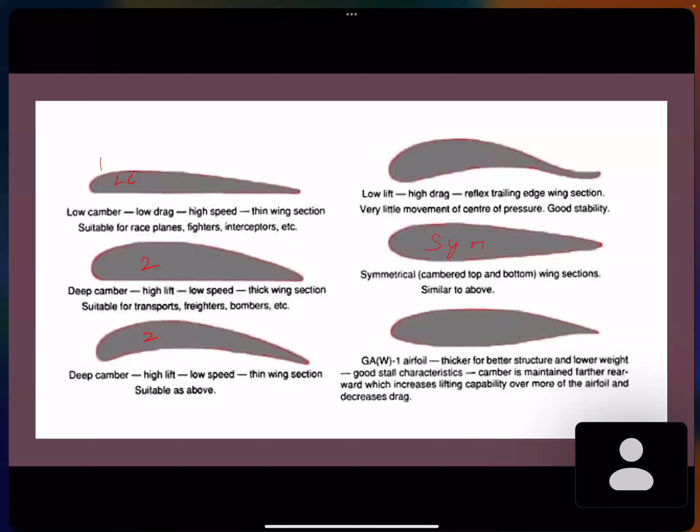Okay, I think it's visible now, right? So the first one was a low cambered airfoil. This is the low cambered airfoil. The other two are deep camber. Both of them produce lift at negative and zero angles of attack.

Then you have this, your reflex airfoil, right? So this is your reflex airfoil. Here it says the reflex trailing edge wing section. That is what Sarthak, I think Sarthak had said. I'm not sure who said it, but Sarthak had said that the trailing edge is curved upwards.

Then you have this last one. Can anyone tell me what this is? This airfoil, this last one. What type of airfoil is that? So you have low camber, deep camber, symmetric, reflex. What is this last airfoil?

Ma'am, I can't hear your voice. Okay, I'm sorry, can you hear me now? Can someone confirm? Okay, so you're able to hear me, right? Santosh, am I audible? Okay, can someone else confirm? Am I audible? Yes, ma'am, you are audible. Okay, thank you, thank you very much.

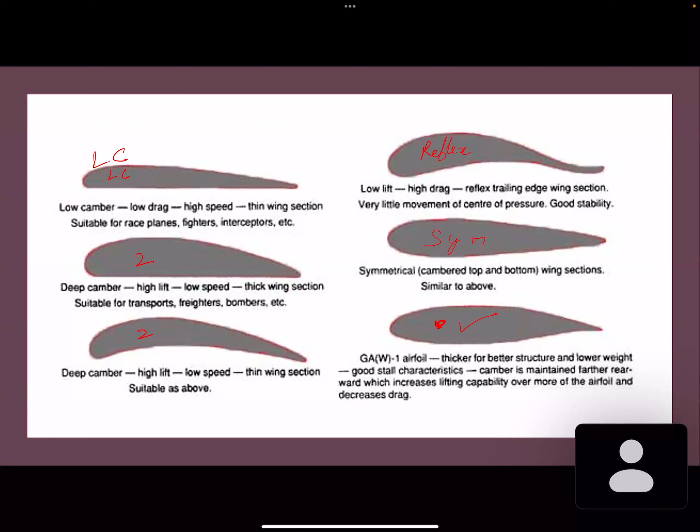Okay, so this airfoil is called a supercritical airfoil. Supercritical. Have you heard of it? The ones from the aerospace background, have you heard of it? Supercritical airfoil?

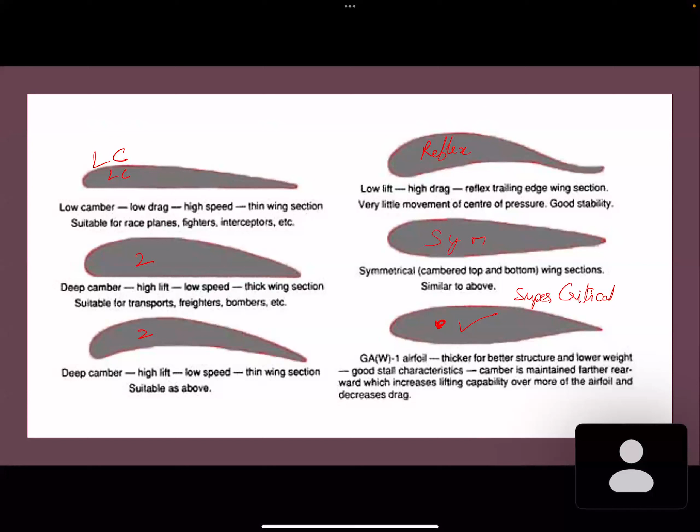Next question was, the aspect ratio of an airfoil is. Airfoil, like we just discussed, is the cross section of a wing, right? What is aspect ratio? What is the formula for aspect ratio? AR is wingspan by chord, is that true? Yes, answer is infinite. What was the formula for aspect ratio?

Okay, write down B square by S, right? So what was B? B by C will be true only if it's a rectangular cross section, right? Rectangular span, I mean. Otherwise it will be B square by S. So B is wingspan, S is the area, wet surface area, right? So B square by S is the aspect ratio.

Now what is the span of an airfoil? What is the B span of an airfoil? What is it? They've asked you the aspect ratio of an airfoil, so what is the span of an airfoil? Of an airfoil, it will be infinite, right? A wing is a finite body, so an airfoil, though we consider it to be the cross section, we assume it to be of infinite length. That is why your aspect ratio will be infinite.

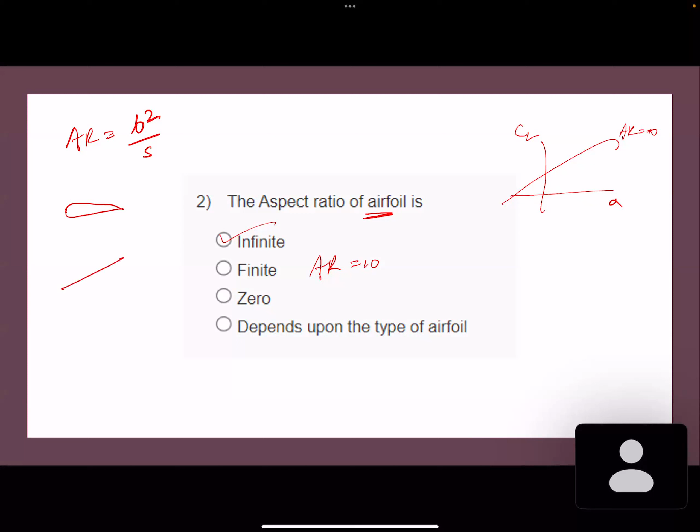Let's look at this. You have a wing of finite length. Initially it was just an airfoil of infinite length. Now when you make it a finite length, you have a wing whose cross section is the airfoil, with a finite length. This is the fuselage, where it's attached, and this is your wing tip.

So when there is an oncoming wind, this is your V infinity, the free stream velocity. When there is an oncoming wind, there is a flow below the wing surface and a flow above the wing surface, and both of them interact at the wing tip. When they interact there, you have vortex generation, with one velocity going from below and one velocity coming from above, and at that point vortices are generated because of this intersection of the flow.

Now when these vortices are generated, the effective angle of attack and effective lift reduce, so there's increased drag production and a reduction in lift. So what happens when you decrease the aspect ratio is that the lift reduces. This will be aspect ratio 10, and when I reduce it further, the slope reduces further, say to aspect ratio 5.

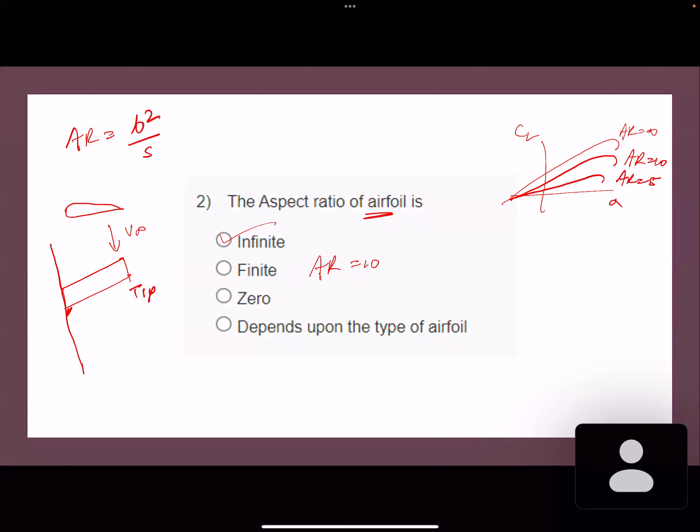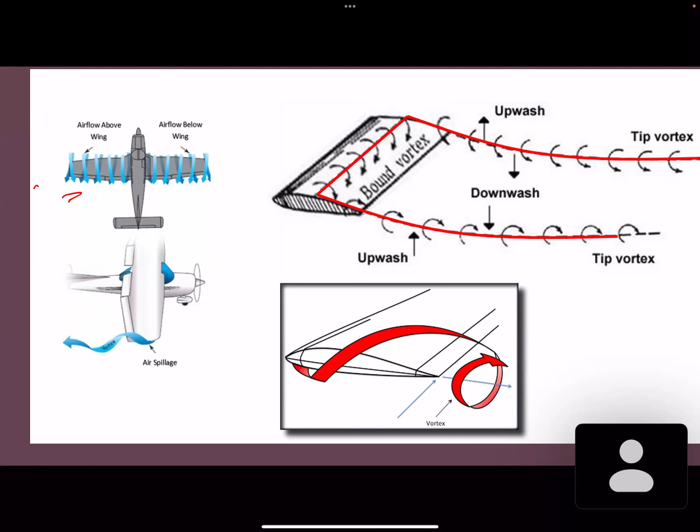Due to this vortex generation, the lift generation at the tip is reduced, which is why our lift curve slope reduced, because for the same angle of attack, your lift generation is less - there is an induced drag component. So vortex generation leads to reduction in lift and an increase in the drag component called induced drag. People from the aerospace background should know this - there is an induced drag component due to this vortex generation. These figures are just representative of the vortices.

Let's go to the next slide. Next question was: longitudinal stability of an airplane depends upon what? Now that you have gone through the week 1 contents, you should be able to answer this. What is stability? Can you tell me, not with respect to aircraft, just in general sense, what is stability?

Ma'am, it's like coming back to the original position after being disturbed. Yes, correct. So initially if it was at equilibrium, it means the tendency to come back to the initial equilibrium. You're right.

So when I say with respect to an aircraft, what will it be? For longitudinal stability, what will it be? Just extrapolate this idea of stability to an aircraft - initial tendency to... So if your aircraft is flying at some angle of attack and there is a gust and it's deflected upwards, so there is a pitch up, nose up. So the tendency of the aircraft to come back to its equilibrium is the longitudinal stability. This is with respect to longitudinal dynamics - when it is pitched up, the tendency of the aircraft to come back down is longitudinal stability.

Now which of these components do you think will contribute towards stability? Is it the tail arm, control surface area, type of winglets, or none of these? Do none of them contribute? Tail arm, yes, you're right. So we had in week 1 an equation of the tail contribution, which we'll be revising in a bit. So the tail arm is what contributes towards longitudinal stability.

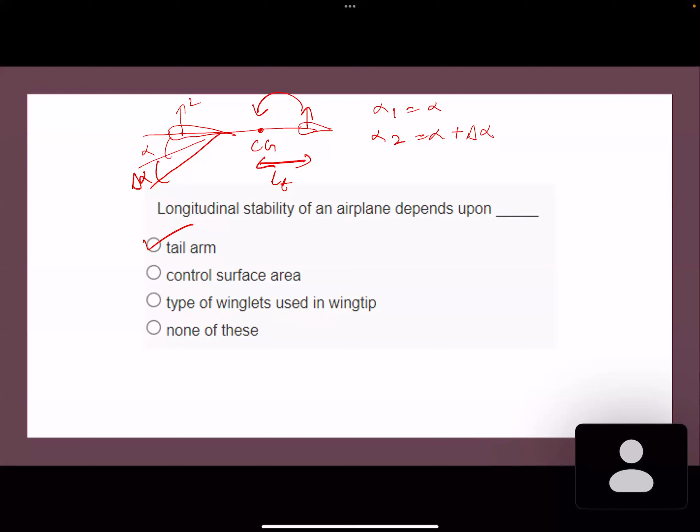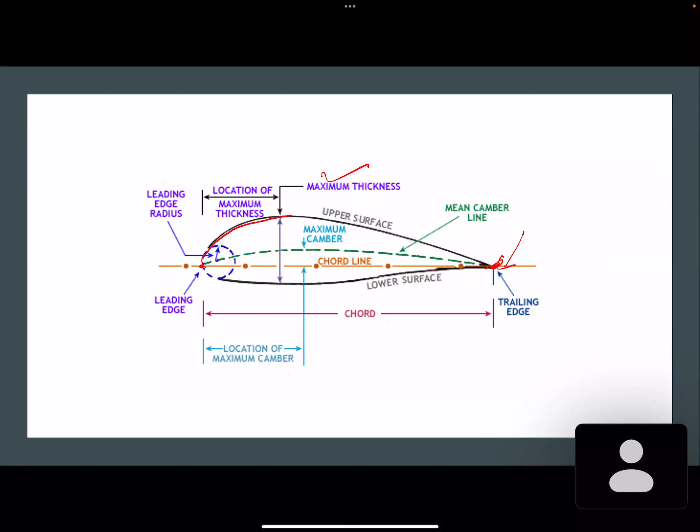So the mean camber line is the one in green, chord line is the one in orange. Both of them connect leading edge to trailing edge. What is the difference? Mean camber line is dividing both the parts equally. Yes, correct, so it is equidistant from both the upper surface and the lower surface. She's right. The chord line is just a straight line from the leading edge to the trailing edge, represented by C, chord length is C, maximum thickness is T. Those are the terminologies you need to be familiar with.

So now let's go back to the question: which of these terms is not associated with airfoil? T by C is the thickness to chord ratio - we know that exists. So you have the maximum thickness T, you have chord C. Next, spiral - did you see any spiral there? No, this is fairly simple. So camber exists, chord exists, so the answer is spiral. Yes, Nandini, you're right, it's spiral.

Okay, next - what is stability and control of an aircraft? Just don't look at the options initially. Just tell me - stability is the tendency to return to equilibrium when subjected to disturbance. I think the first two and the third have the same definition of stability. That is correct, right? So it has the same. Now let's look into control.

Can someone tell me what is control? Don't look at the options, just tell me what you understand by control. Stability is the inherent tendency of the aircraft to return to equilibrium position. What is control? Just from the term, what do you understand by control?

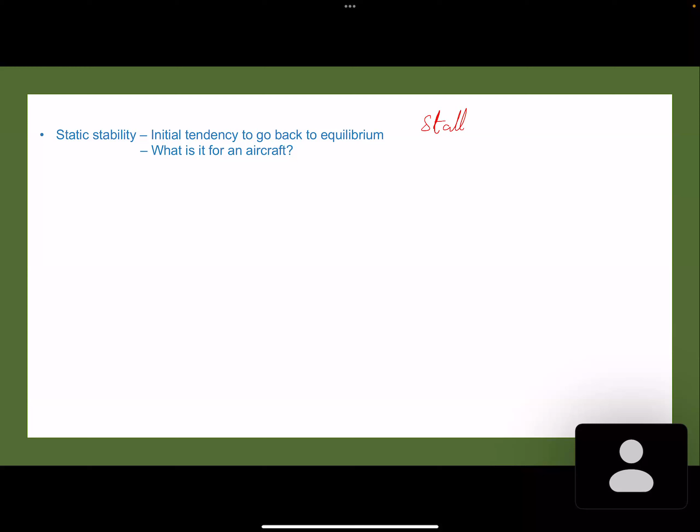Okay, so now both of them are right? There's also flow separation. Yes, all three are right in fact. So let me just draw this lift curve slope.

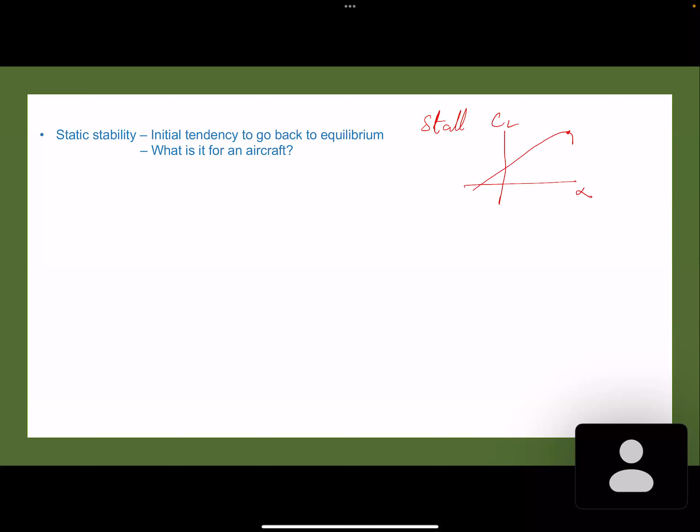So this is CL, this is alpha. Now this is your point of maximum CL, right? So when the angle of attack reaches this angle, which is referred to as alpha stall, it reaches the maximum lift generation capability. Any angle of attack beyond alpha stall, the lift drastically reduces.

So both the first points are right. Why does it reduce? Now let's look into that. So if this is your airfoil, initially this is your flow. Now I increase the angle of attack, something like this. What happens is it goes like this, right?

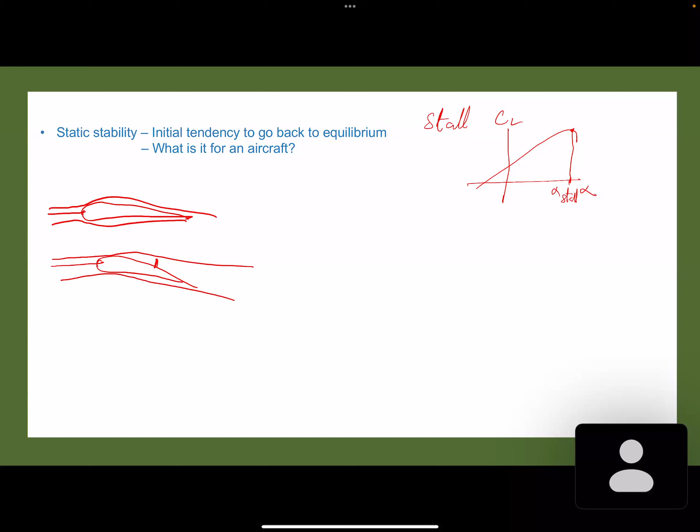So there is a flow separation here, and due to that flow separation, it is not producing as much lift as it should. So any angle beyond that alpha stall, it will not produce enough lift to sustain flight, and the aircraft will suddenly just drop. So all 3 points are right: max lift crossed, point at which lift suddenly falls, and this is why it's happening, it's because of flow separation. It doesn't produce enough lift to sustain the flight.

Okay, so this is the idea for static stability. Now I think sir would have taken an example of the ball in a bowl, so let's just go over that briefly. I think it's also part of your assignment, so let's go over it.

So there are 3 conditions: statically stable, neutrally stable, and statically unstable. Okay, so you have a bowl, and if I have a ball here in the vessel, and if I push it to this point, it has an initial tendency. In fact, it will swing and come back to its initial equilibrium point.

So this is statically stable. Now, if I keep the same ball on a flat surface, and if I move it, displace it to another location, will it come back to the original position? No, it will form a new equilibrium at the new point. This was the initial position, this is the new position. It will not come back to position 1, it will form a new stable equilibrium at the new position. So this is called neutrally stable.

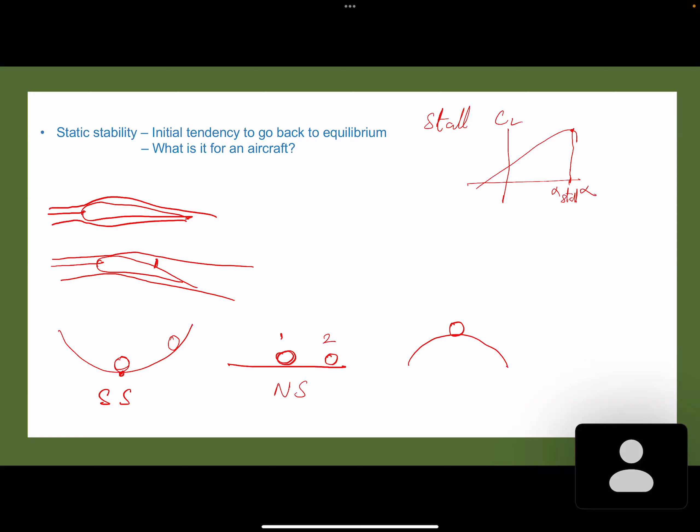Next condition is an inverted bowl, and I keep a ball over it. If I displace it even slightly, it will just keep going further away from the equilibrium point and show no tendency to come back. So this is unstable. Now this is static stability, which tells you that it has an initial tendency to come back to equilibrium.

What about dynamic stability? What does that bring into your mind? What does the word dynamic mean? Dynamic stability, just think about it.

Dynamic means moving. So when I say dynamic stability with respect to time, Nandini is right. Both of you are right when it's moving.

Let me take a graph and show you this. Suppose this is your equilibrium point, this horizontal line. I deflect it to some position, I disturb it, and over a period of time, if it decays and tries to come back to its equilibrium, it is dynamically stable. Now, same thing, if I had disturbed it and it continues to deviate away, it is unstable, right?

So this is the difference between static and dynamic. Dynamic is over a period of time, will it come back to its equilibrium or will it go away from the equilibrium? Static is just the initial tendency that it shows. So this is the difference.

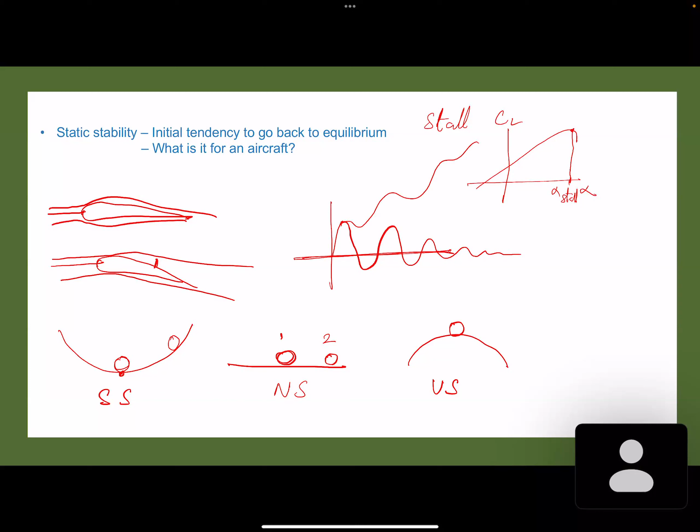So at the beginning of this course, we will be dealing with static stability and we'll slowly go on to dynamic stability. Now, the next concept that we dealt with was aerodynamic center, right?

So when you consider an airfoil, let me just draw this. When we study aerodynamics, what we see is that the lift and drag - what are the aerodynamic forces? Lift and drag, right? So lift and drag are presumed to act at a point called center of pressure.

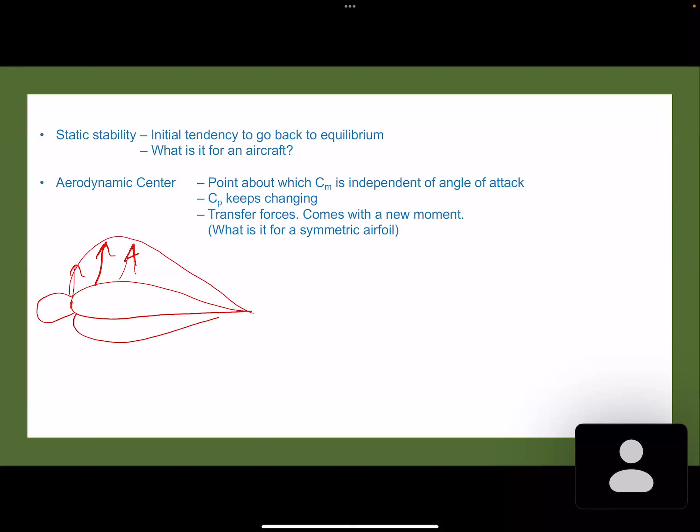So you have pressure being generated here, something like this. You have some profile like this, and this is negative pressure, and this is positive pressure, which is why your airfoil produces the lift, correct?

Now, it is presumed these forces, lift and drag, are presumed to act at a point called center of pressure. Now, what happens with the center of pressure is that it keeps changing with angle of attack. So when the same airfoil is kept at a different angle of attack, this pressure profile will change, right?

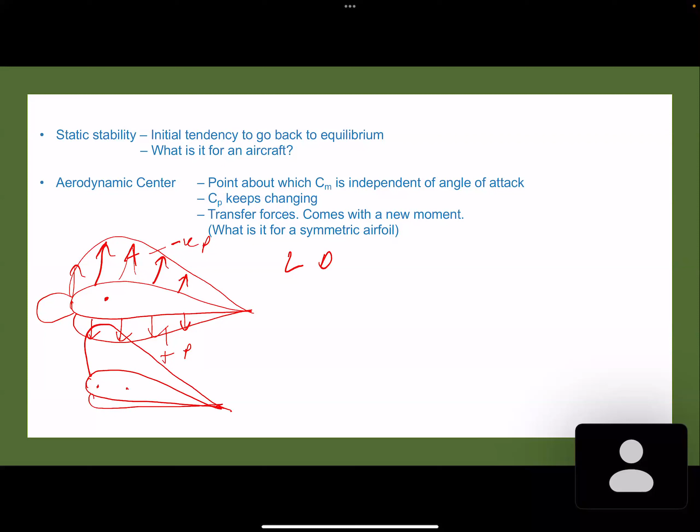So it will be something like this. The center of pressure moves ahead. It was initially here, it moved here. So with change in angle of attack, the center of pressure keeps changing. It becomes very difficult to analyze the moment and the forces when the point of reference keeps changing.

So we came about this point called aerodynamic center. What is aerodynamic center? It is a point that is independent of angle of attack. So aerodynamic center is the same point at which the moment remains the same throughout the flight duration. No matter how much the angle of attack changes, the moment at the aerodynamic center is the same. It becomes very convenient to do your analysis when the point of reference is fixed.

What happens now is, so this was center of pressure, and suppose your aerodynamic center is somewhere here. So our lift and drag are acting at center of pressure, but we wish to do our analysis at aerodynamic center because it is easier, right?

So when I transfer the forces to a different point, the forces get transferred. So my lift and drag are now here, but together with that, what comes? A moment is coming into picture, right? So when I move the forces from center of pressure to aerodynamic center, it comes with a moment.

So in this case, the drag will not produce any moment. Lift will produce one pitch down moment, nose down, right? So it is in this direction - nose down moment is produced. So that I can write it as M at AC. So when I move the forces from center of pressure to aerodynamic center, at the aerodynamic center, you have lift, you have drag, and you also have a moment, MAC, okay?

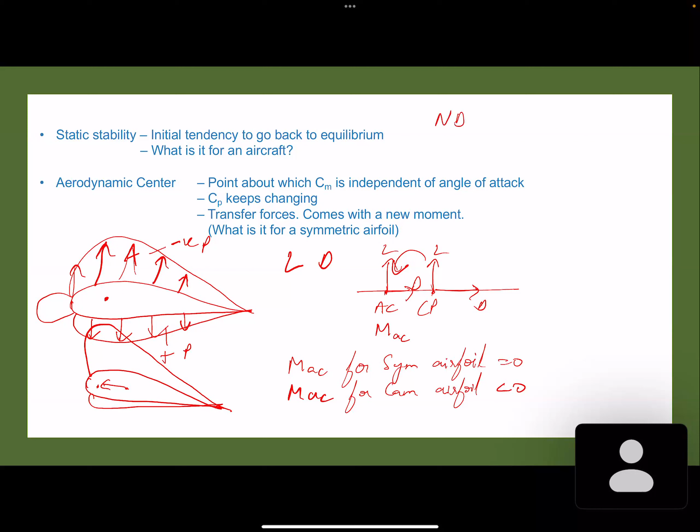So when I transfer the lift and the drag to AC, it gives you a nose down moment. By convention, nose down is negative, nose up is positive. This is the longitudinal motion convention: pitch up or nose up is positive, pitch down or nose down is negative.

So for a cambered airfoil, it produces a pitch down moment. So the moment that comes when I transfer the forces is pitch down, so it is negative. MAC for a cambered airfoil is negative.

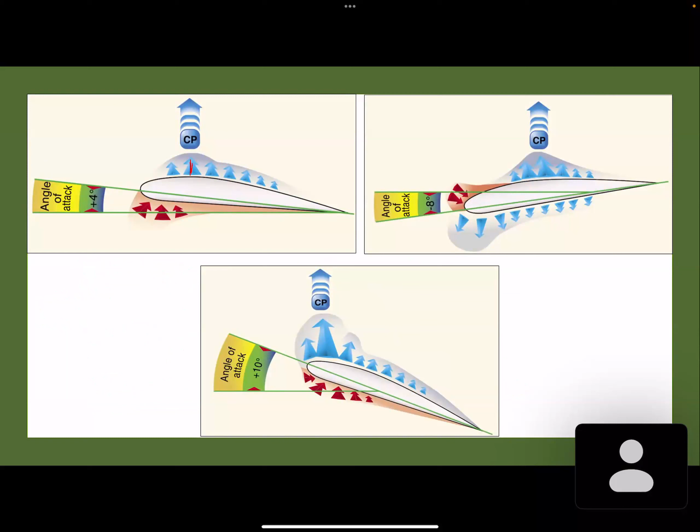This is just a depiction of how the center of pressure keeps changing with respect to change in angle of attack. Initially it's at this point. When I reduce the angle of attack to -8 degrees, the center of pressure moves back. When I increase the angle of attack to 10, it moves ahead. So the analysis becomes extremely inconvenient because your point of reference keeps changing, which is why we came up with the aerodynamic center.

Now another concept that was introduced is trim. Trim is something like an equilibrium, where the sum of the forces and moments are 0. So trim is the point where summation of all your forces and moments are 0. That is just the concept.

Now I've put the pitching moment convention here. Nose up is positive, we had just discussed this. Nose up is positive, nose down is negative. Pitch up is positive, pitch down is negative.

Now this is the equation for pitching moment coefficient: Cm equals Cm naught plus dCm by d alpha into alpha. So it is a straight line. We are assuming it to be a straight line variation with the intercept as Cm naught and slope as dCm upon d alpha. Now for static stability, we require the slope to be negative.

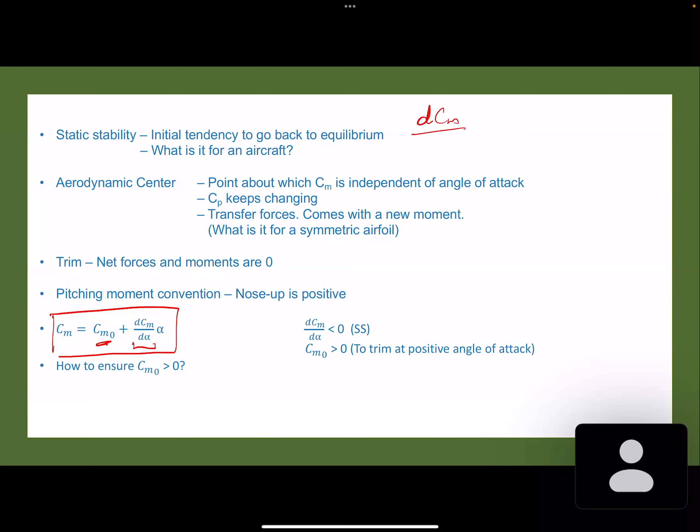The sole condition for static stability is that dCm by d alpha, which we refer to as Cm alpha, should be less than 0. This is the condition for static stability. Another condition that Sir has also mentioned in the lectures is that Cm naught should be greater than 0.

So now when I look at the curve, we know that Cm alpha should be negative, and we know that Cm naught should be positive. I'm just drawing for a typical aircraft. How will it look? This is your line: this is Cm, this is alpha, this is Cm naught, and you have a negative slope. So this is a statically stable typical aircraft.

Now, if I have Cm naught negative, how will the curve look first of all? Can someone tell me? Here Cm naught is positive. If I have to make Cm naught negative, how will the curve be shifted?

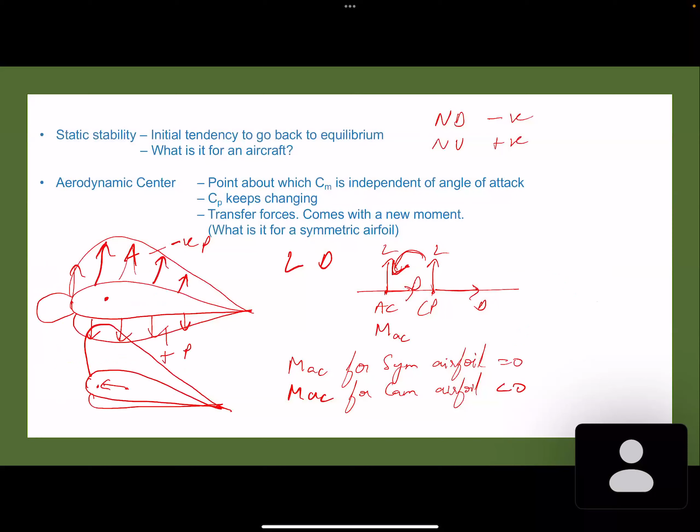Now I've put up this question that asks how to ensure Cm naught is greater than 0. Now let's get back to our initial question of reflex airfoil. Where was that? Yes, so this is our reflex airfoil. Now, can you try, with the knowledge that you have now, to tell me why do

we have reflex airfoil? So for symmetric airfoil, this is symmetric, this is cambered. Your Cm naught or CMAC is 0, right? Because center of pressure and aerodynamic center are the same point. For symmetric airfoil, the Cm, pitching moment that comes because of transfer of forces, is 0. For cambered airfoil, your CMAC is less than 0.

So for reflex airfoil, what will change? For cambered airfoil, this is your CP, this is your AC. For reflex airfoil, how will it look? Just try to put everything together.

Just try. So symmetric airfoil, CMAC or Cm naught in this case is 0. Cambered airfoil, it's less than 0. That means cambered cannot be trimmed at positive alpha. So if I have to trim the aircraft at positive alpha, what do I have to do?

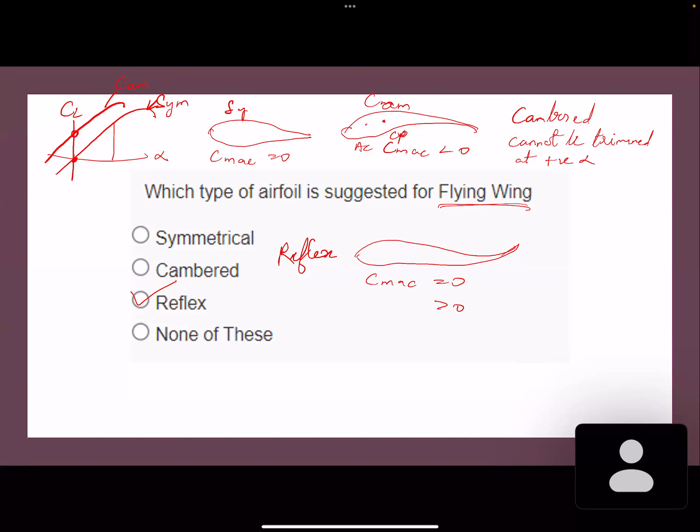So I had mentioned that we prefer CMAC to be greater than 0 so that we can trim the aircraft at a positive angle of attack. But even 0 is fine. But you do not generally prefer to trim your aircraft at negative angles of attack, which is why we don't take a cambered airfoil for just wing configuration.

So the trailing edge curvature up ensures that the CP moves towards aerodynamic center. So ideal case for reflex is AC and CP at the same place, or CP can even move ahead, producing the CMAC greater than 0. Depending on the curvature at the trailing edge, CP can either be at AC or ahead of AC, giving you CMAC 0 or greater than 0.

So this is for CP equal to AC. This is for, what do I say, CP ahead of AC. So that is why we brought into picture the reflex airfoil, that is why it was designed. Let's get back to our slides.

So can you think of any other way we can ensure Cm naught to be greater than 0? So if it is just a wing, there's nothing you can do except for the reflex airfoil. Any other way to make Cm naught greater than 0? You have all gone through week 1 contents, right? So I'm just going over the topics. So from whatever you've learned in week 1, can you try to tell me another way we can make Cm naught

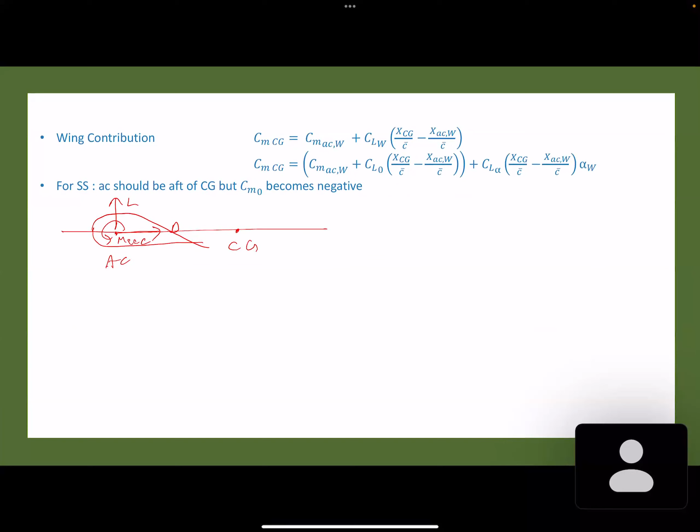So this equation, I'm pretty sure you know how to derive it, but I'll just write it down. So if you have just a wing, so your fuselage reference line, you have a wing, and this is your CG, this is your AC. So your lift is here, drag is here, and you have some moment at AC. So now let's take the forces at the CG, so moments at the CG. So you have Mcg equals, can you just give me the equation, equilibrium equation?

So it will be lift. Okay, before that I need to mention the, one second.

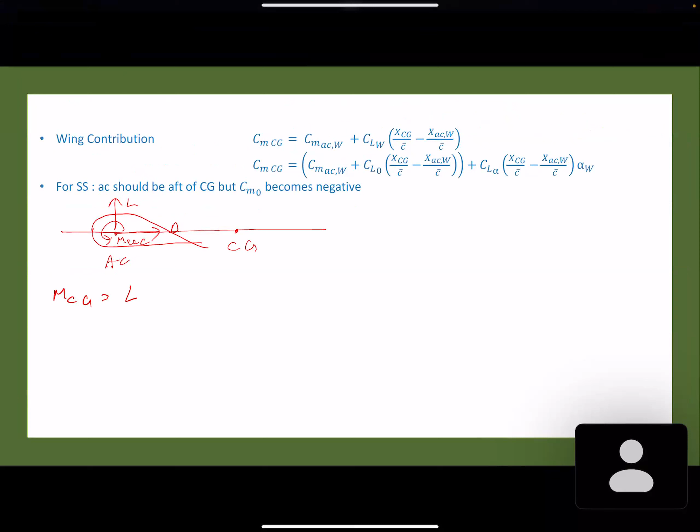So this was XAC and this distance is XCG. Okay, now let's take the moments at CG. Moment at CG is lift into XCG minus XAC. Now drag will not produce any moment because we've considered CG to be on the fuselage reference line. Then you have plus MAC.

Okay, so now you non-dimensionalize it by taking the coefficient of moment, so you have CMCG. So what was CL? What is the equation for CL? Okay, so lift is half rho v square S CL.

So similarly, what is pitching moment? Half rho v square... Am I audible? Are you with me? Yes ma'am. Okay, so lift is half rho v square S CL. Now for pitching moment, M is half rho v square... so you know there will be a CM here, but what else? Are you familiar with this equation? Yes ma'am. Okay, so similarly try to tell me for pitching moment, half rho v square, it will be S and C. Exactly, Harshal is right, so half rho v square S C CM.

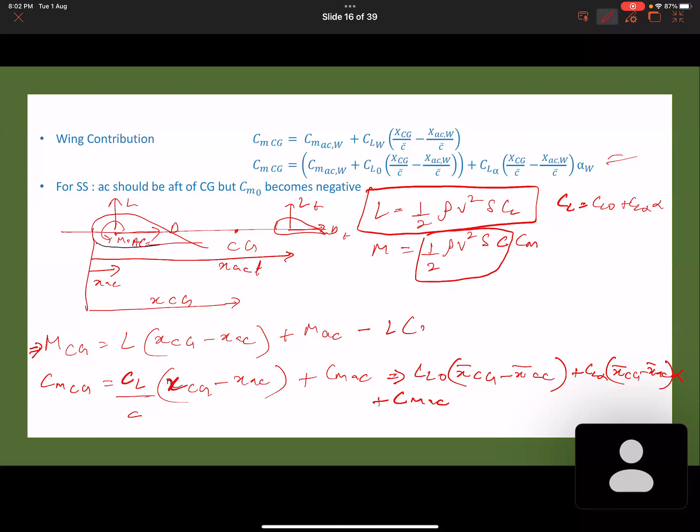Now if you have a tail, you take its lift and its drag, so you will have lift tail, drag tail, and another distance XAC tail. Similarly you add on the components, so here you will have minus L tail into XAC tail minus XCG, right? And then you derive it so on and so forth to get your wing contribution, tail contribution. So this is your wing contribution and this is your tail contribution.

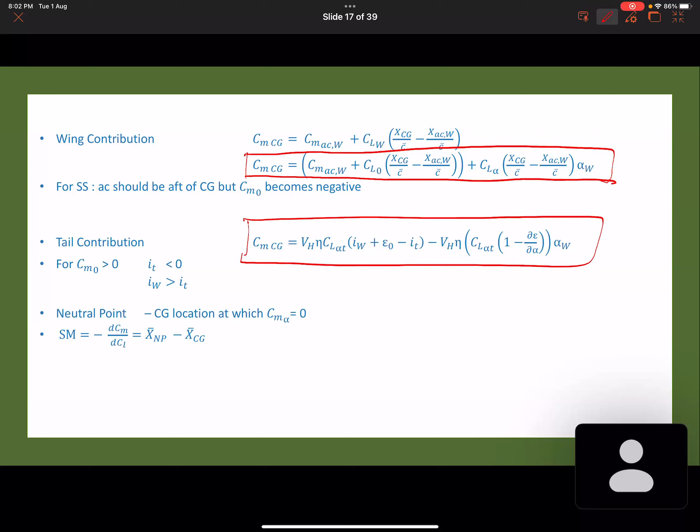Okay, let's go to the next slide. Yeah, so this is your wing contribution, and this is your tail contribution. Okay, so now each of those contribute towards CM naught, CM alpha. Our main equation was CM is CM naught plus CM alpha into alpha. So now in this wing contribution, what is CM naught?

This is wing, this is tail. In the wing contribution, what is CM naught? What is the wing contribution towards CM naught? Just equate these two equations. So the terms dependent on alpha, terms independent of alpha, just look at that.

Okay, in this wing equation, can you tell me what terms do not depend on alpha wing? This alpha wing, which term does not depend? Yes, first two terms, correct. So this entire thing is the CM naught contribution of wing, and this one is the CM alpha contribution of wing. Similarly for tail, this entire thing is the CM naught contribution of tail, and this entire thing is the CM alpha contribution of the tail.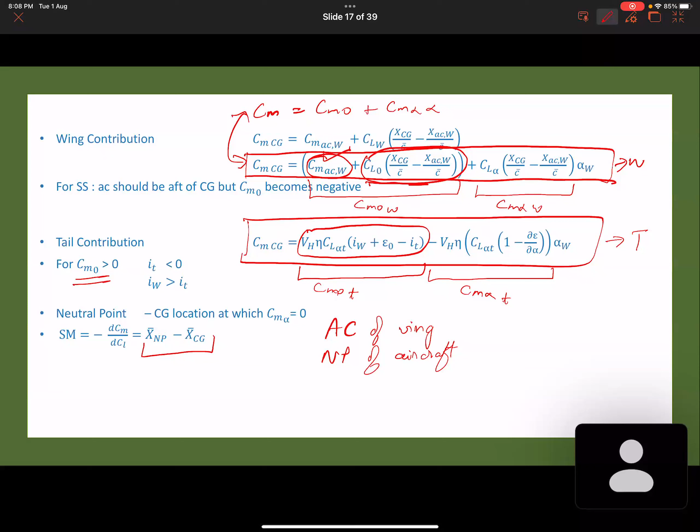Now let's look over a few questions based on these concepts. So aerodynamic forces acting on the aircraft depend on relative ground speed, wind speed, relative airspeed, or none of these. What are the aerodynamic forces? We just discussed this.

Drag, lift. Yes, lift and drag. So do they depend on relative ground speed, wind speed, relative airspeed? What is it? The formula we just wrote, lift is... what was the formula? In the previous slide we wrote it, where was it? Yes, this formula: CL half rho V square, half rho V square S CL. It depends on this velocity. What velocity is this? It is the relative airspeed, right? So it is your free stream velocity. Either the aircraft is moving with respect to the air or the oncoming air. However you see it, it's the relative airspeed. So this is the answer.

Somebody has said lift, drag, thrust, and weight. How can you tell me thrust is an aerodynamic force? Does it depend on the relative airspeed? So thrust is a propulsive force, right? Your propulsion system produces the thrust, either the propeller or the jet engine or whatever produces the thrust. So thrust is a propulsive force, and weight is definitely not an aerodynamic force. It is the gravitational component, right? Gravitational force. So you have three main types of forces: propulsive, aerodynamic, and gravitational. Gravitational is the weight, propulsive is the thrust, and aerodynamic is the lift and drag.

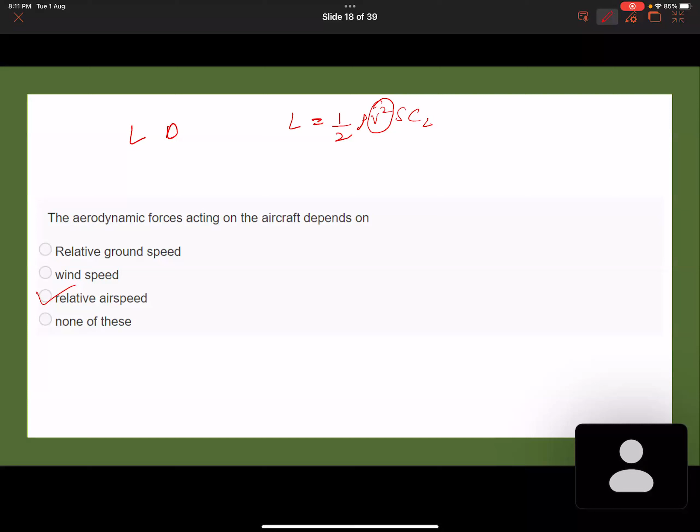Okay. I hope that settles that. Okay. Let me know if you have any question.

Okay, next question. So lift and other aerodynamic forces are generated by the motion of an aircraft through air. Okay. Which one is correct about aerodynamic center of an aircraft? Aerodynamic center does not depend on location of center of gravity. It depends on location of center of gravity, depends on neutral point, or none of these.

What is aerodynamic center? Can somebody just give me a definition? We just discussed this. Where ma'am, net pitching moment is 0. Yes. Okay. Where pitching moment is independent of angle of attack. Sorry yes ma'am, where pitching moment is 0, what is that point called? So aerodynamic center is where Cm is independent of alpha. What you had said is pitching moment is 0. What is that point called? Maybe neutral point. No, just think about it.

Center of pressure is where lift, drag, and all forces actually act. We transfer them to the aerodynamic center for ease of analysis. So let me clarify this once and for all: center of pressure is where lift and drag act, while the aerodynamic center is where CM is independent of alpha. So aerodynamic center is also where you transfer your lift and drag. Next point is where CM naught is 0, or where the moments are 0, where the forces are 0. What is that point?

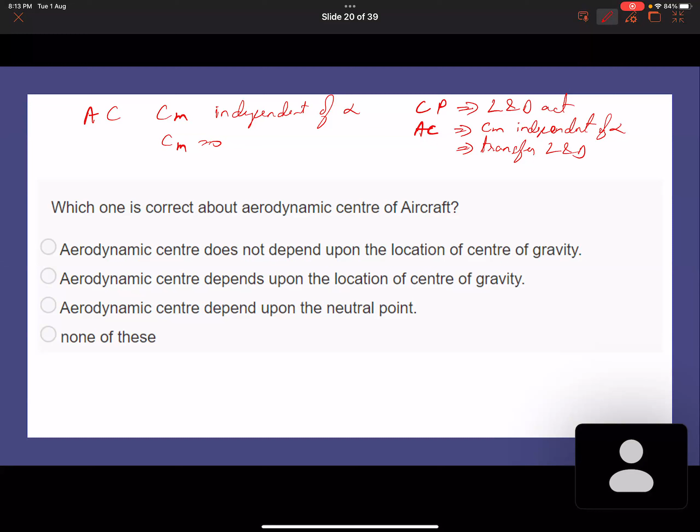We just discussed this, right? Where the net forces and moments are 0, that's called trim. So this would be trim.

Coming back to the question, which one is correct about aerodynamic center? Aerodynamic center is the point where CM is independent of angle of attack. That is the only way to define it. Now look at the options: it does not depend on location of center of gravity, it depends on location of center of gravity, or it depends on neutral point.

Does it depend on the location of center of gravity? Does the aerodynamic center depend on location of center of gravity? No, correct. So that is the right answer.

What is center of gravity? That's another point, CG. Another one is neutral point. Let's discuss all of these. What is CG? Very simple - net weight acts. What is neutral point?

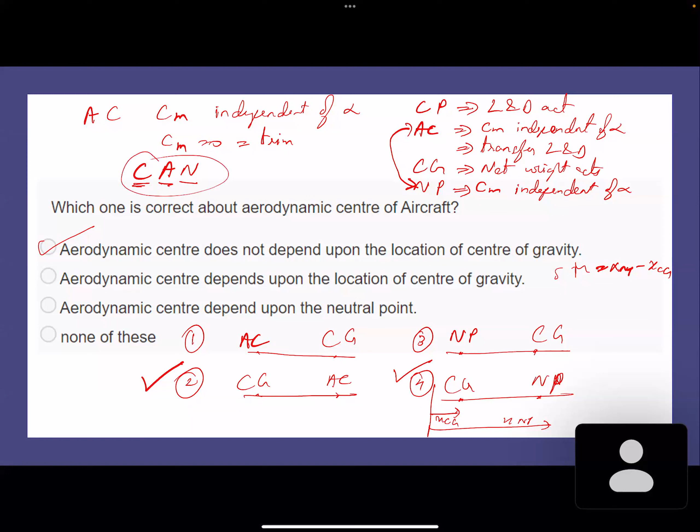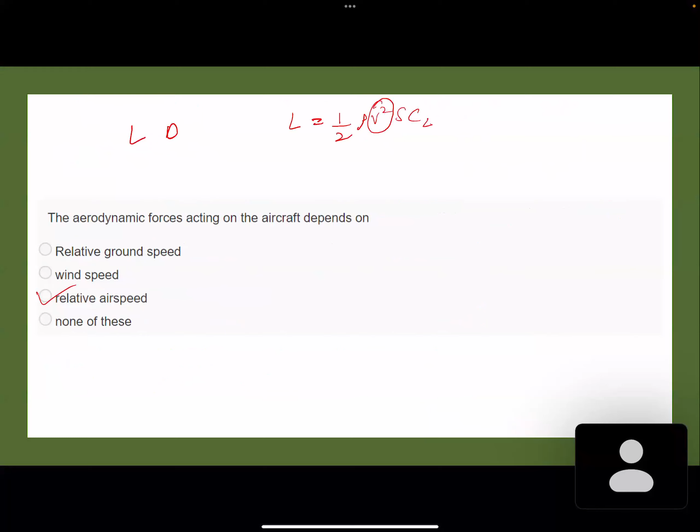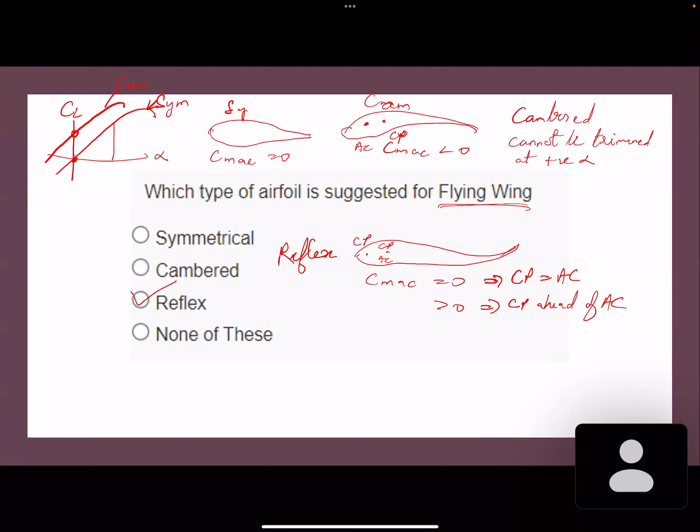We had just discussed this, where is it? Yes, in the very first slide we discussed this. So if this is a cambered airfoil, AC is here, is CP ahead or behind AC?

Behind. What happens? Let's go back to our slide. When I transfer the lift to AC, it comes with a moment - nose down or nose up moment? When I transfer this lift to AC, it comes with clockwise or anti-clockwise moment? Anti-clockwise, which in this case is nose down, right? So it comes like this, that is nose down. Nose down is positive or negative? Negative. So your answer is negative.

It's the same question as this one, just phrased in a different manner. Do not get confused. They're asking you for the same thing: a positively cambered airfoil produces negative pitching moment about aerodynamic center. That means your Cm naught, or CmAC, is negative for cambered airfoils, while Cm naught equals CmAC equals 0 for symmetric airfoils. So these are just two ways in which the same question is being asked. Do not get confused.

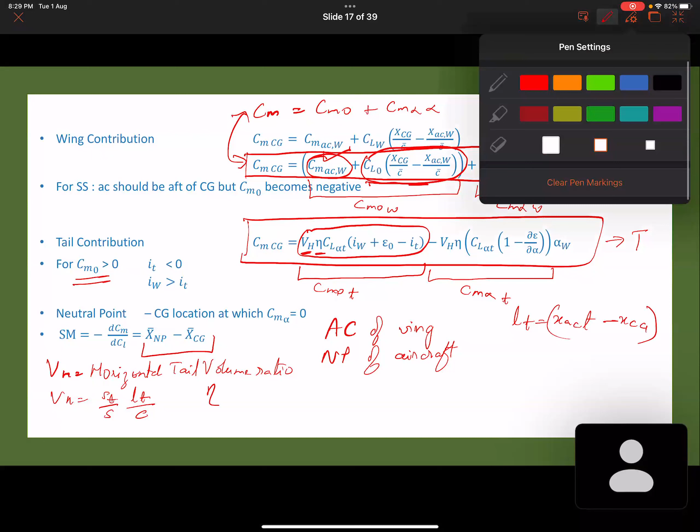Okay, next, what is this eta? What is eta? It is V infinity dash square by V infinity square. What is V infinity? It's the free stream velocity seen at the wing. Now at the tail, due to this vortex generation, there is a reduction in the velocity, so it will not be the same velocity, which is what this ratio represents - it's the tail efficiency factor. CL alpha tail, what is that?

What is CL alpha tail? How do you categorize that? It's the lift curve slope of the tail, right? Correct me if I'm wrong.

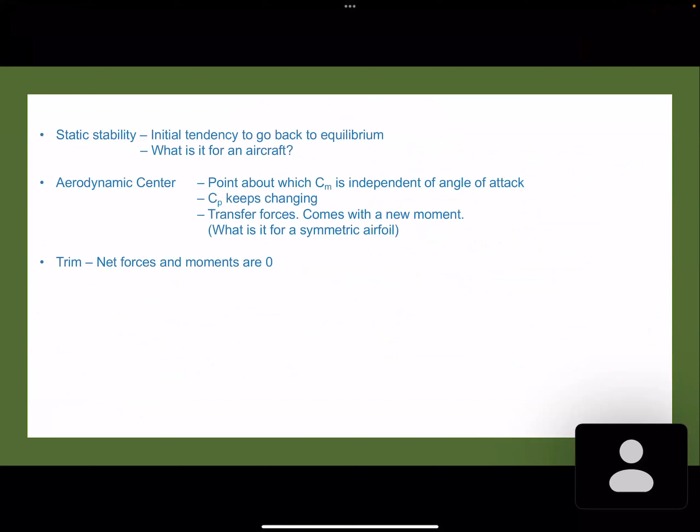Just try to get an empty slide. So this is your lift curve slope, right? If I write the equation for this in the linear section, you have CL equals CL naught plus CL alpha into alpha. So this is your intercept, this is CL naught. This slope is CL alpha. CL alpha is dCl upon d alpha, the lift curve slope.

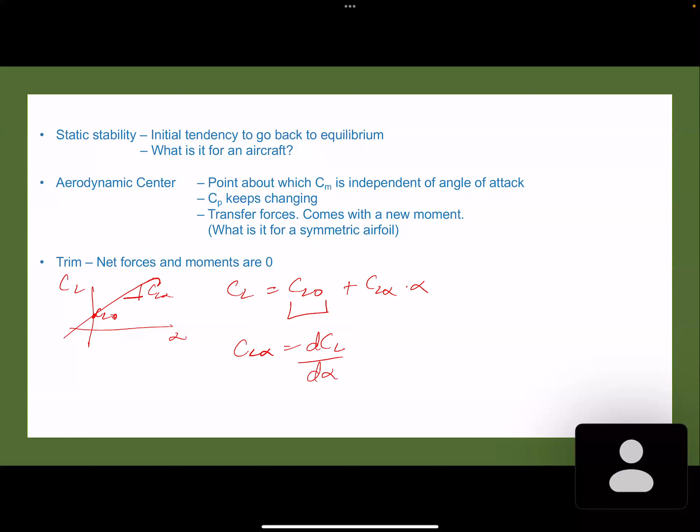So that is the lift curve slope of the tail. Now what is IW? One of you had in fact told me when I asked what is Cm naught greater than 0, you had told me this thing. What is IW?

Am I audible? Yes ma'am. Okay, can anyone try to tell me what is IW? No? IW is the wing setting angle. What is wing setting angle? From the word, can you try to tell me what wing setting angle is?

Let me draw this. This is your fuselage reference line. Now if your wing is initially fixed on the aircraft at an angle, this is your I wing. Aircraft is not flying anything, it's at the ground level. If your wing is fixed on the fuselage reference line at an angle, that is called wing setting angle. Similarly, IT is tail setting angle. Is that clear?

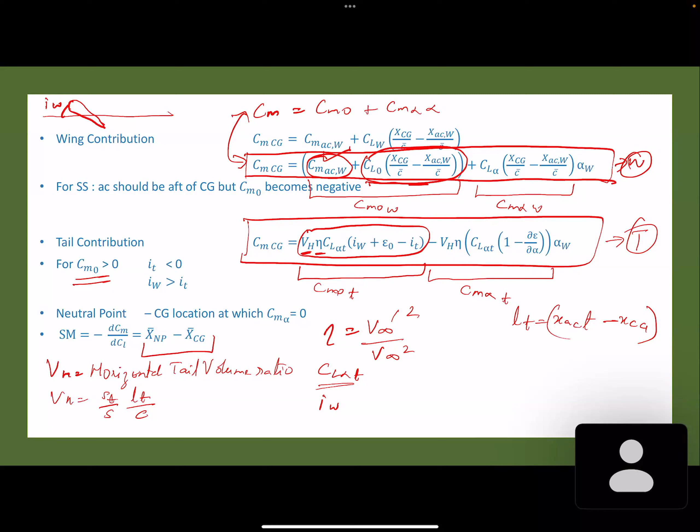So I'll just go over this epsilon. Let me just erase these. So anywhere you have any doubt when I'm going over the equation, just stop me and ask me, okay? Let me just tell you what epsilon is. Epsilon is again linearized, epsilon naught plus d epsilon by d alpha into alpha. Epsilon is the downwash angle.

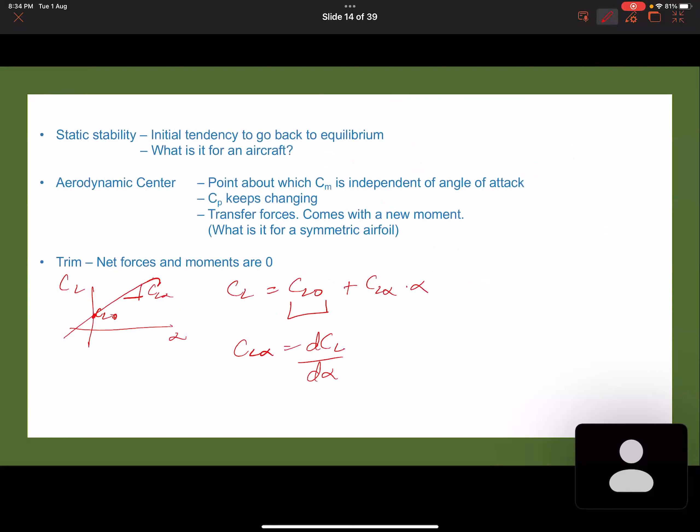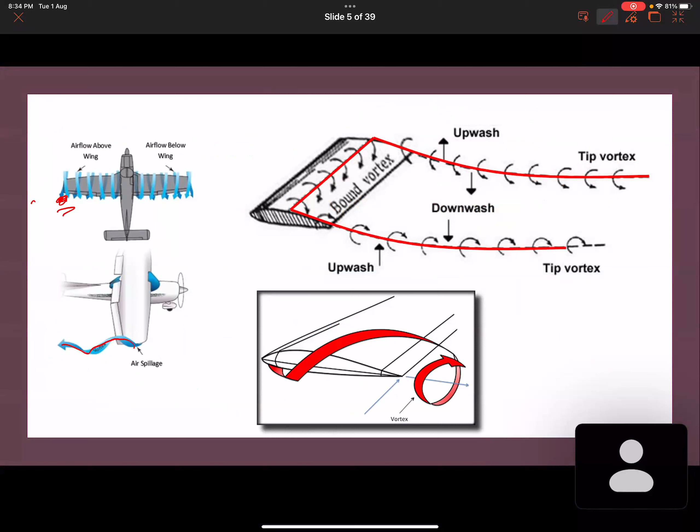What is downwash? We had seen that there is this vortex generation at the wing tips, right? So these vortices are generated here at the wing tips. Now they travel backwards towards the tail. When it reaches the tail, what happens is that the velocity the wing sees is not the same velocity that the tail sees, because of these vortices there is a difference in the velocity.

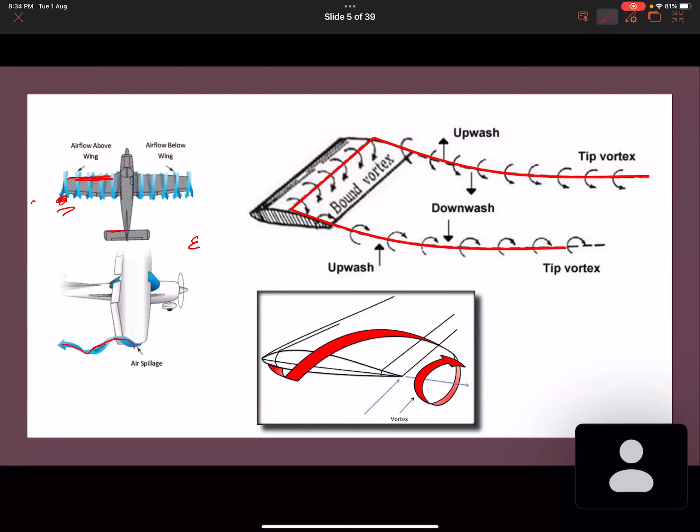Similarly there's a difference in the angle of attack. Everything changes at the tail by a margin. So the difference in the angle of attack seen at the wing and the tail is this downwash angle, epsilon. So that epsilon is represented in terms of alpha using this equation.

Now when we use this epsilon in this derivation, you will find that it appears in two different components. So how is it featuring into the final equation? So you have angle of attack at the wing. In this previous derivation we saw that angle of attack of the wing is what we are seeing, right? Now when we take tail, you will have angle of attack at tail. Angle of attack at tail is nothing but wing angle of attack minus wing setting angle plus tail setting angle and minus epsilon.

Okay, when you do this derivation, just look at this - this will be the formula for angle of attack at tail, where I wing is wing setting angle, IT is tail setting angle, epsilon is the downwash angle. What is downwash angle? Due to the vortex generation at the wing, there is a reduction in the angle of attack at the tail. The angle of attack seen by the wing is not the same angle of attack seen at the tail.

So there is a reduction in this angle of attack - that reduction is this epsilon, the downwash angle. Is that clear? Is there any confusion with this term? We will do this derivation in the next class, let's just go through it and come. But as of now, is there any confusion with the terminologies?

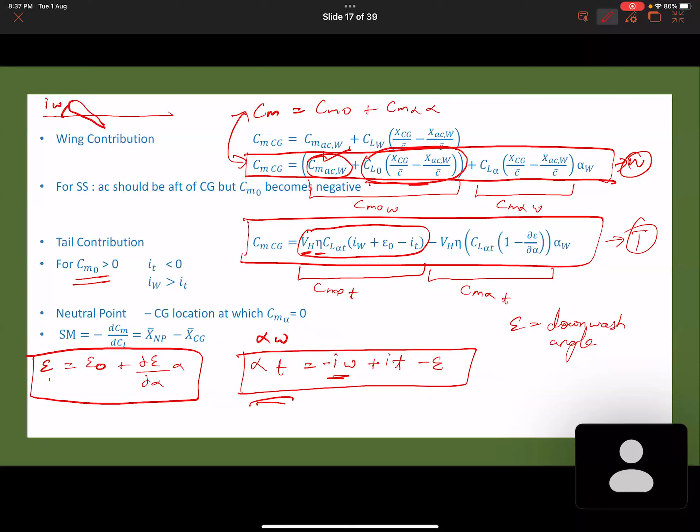Coming back to our question: a positive tail incidence angle setting compared to zero tail incidence angle setting will result in what? Let me write down the equation. The tail setting angle is here. So tell me, if that is positive versus zero, what will the difference be in the stability?

This is Cm naught of tail, and this is Cm alpha of tail. Does Cm naught contribute towards stability?

What is the condition for stability? Only one condition. We had discussed that there is only one condition for longitudinal static stability. What is that condition? Cm naught is only for trim, so what is the condition for stability?

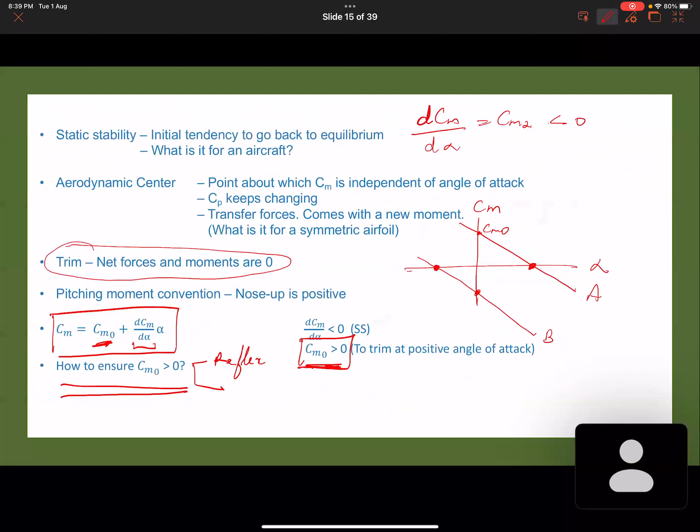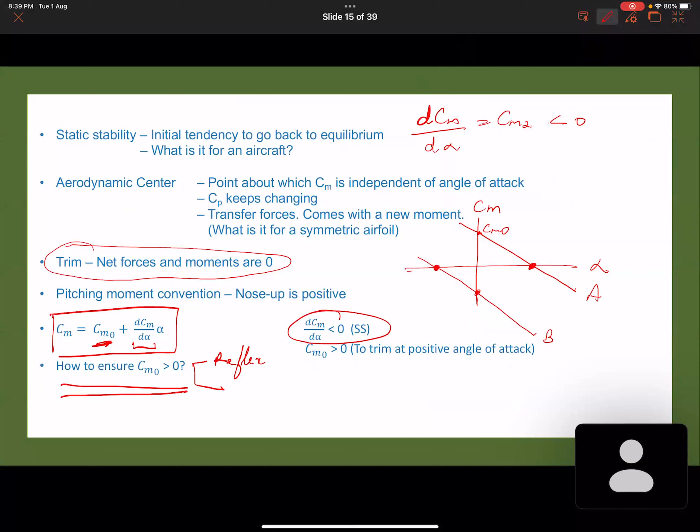CAN, yes - that means Cm alpha should be less than 0. For static stability, Cm alpha should be less than 0. This was the condition we had discussed, the only condition necessary for static stability: it should regain equilibrium, meaning Cm alpha should be less than 0.

Now, is this tail setting angle, IT, coming anywhere in Cm alpha?

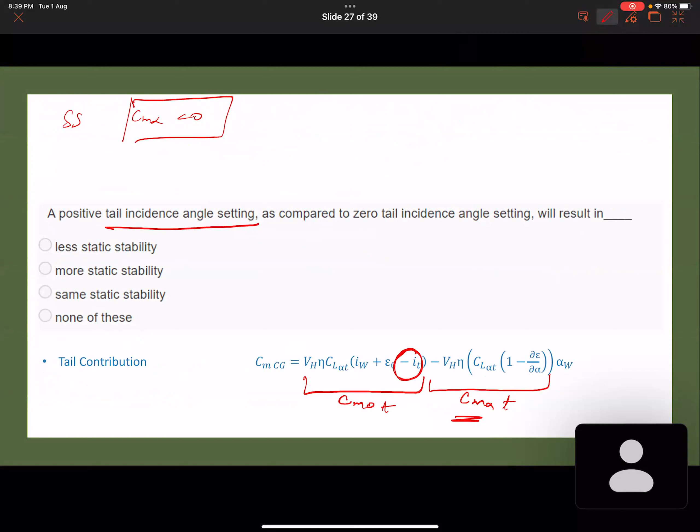What is CAN? It's just a mnemonic I came up with - CG should be ahead of both the aerodynamic center and the neutral point. There's no deeper meaning, it's just something I used to remember it by. You don't have to follow it, I just thought it would be easier.

So forget about that - just tell me, is this tail incidence angle, IT, coming anywhere in your Cm alpha contributions?

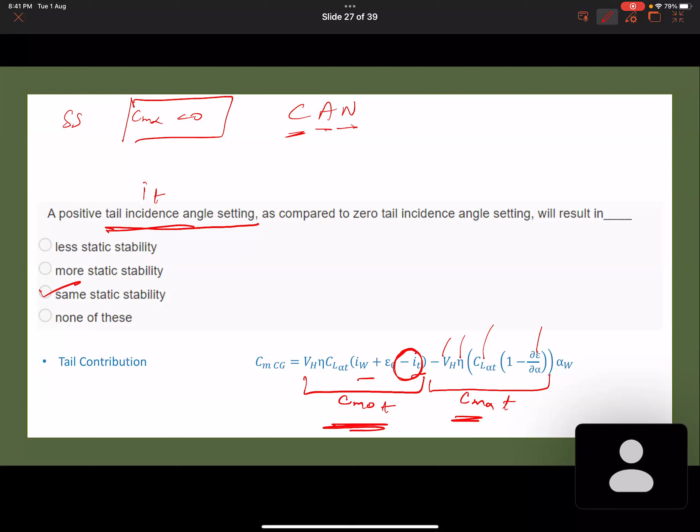No. So tail incidence angle does not contribute towards stability. A positive or negative tail incidence angle will not give more or less stability - it remains the same. It only changes Cm naught, and Cm naught, as was mentioned, is only for trim. So tail setting angle, wing setting angle, epsilon naught - all of these contribute only towards the trim condition, not towards stability. What contributes towards stability is VH, eta, CL alpha of the tail, and d-epsilon by d-alpha. These things contribute towards stability. So the right answer to this question is the same static stability - changing the tail setting angle does not change or affect stability in any way.

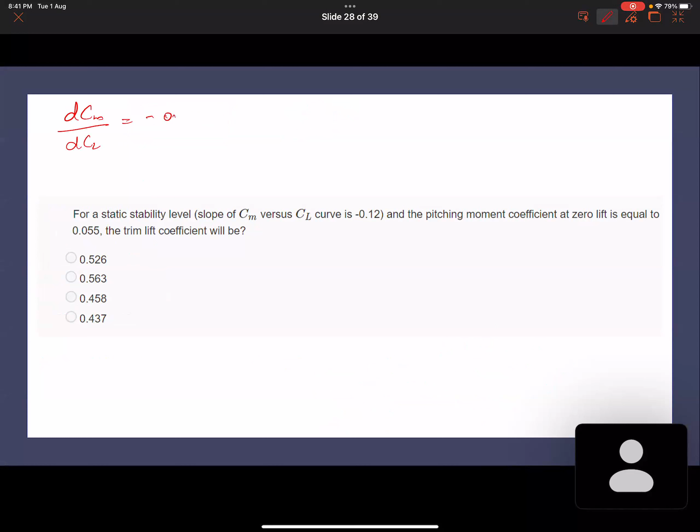For a static stability problem, the slope of Cm versus Cl is minus 0.12 - let me write down dCm by dCl is minus 0.12. And the pitching moment coefficient at zero lift, Cm naught, is equal to 0.055. Since Cm naught is positive, it is possible to trim the aircraft at a positive angle of attack. So, what is the trim lift coefficient?

How do we do this? Any idea how to start? Just take the basic equation for pitching moment - the straight line equation. What is that equation?

So Cm equals Cm naught plus Cm alpha into alpha. This is your straight line equation, Cm versus alpha. Let's expand this: Cm naught plus dCm by d alpha into alpha.

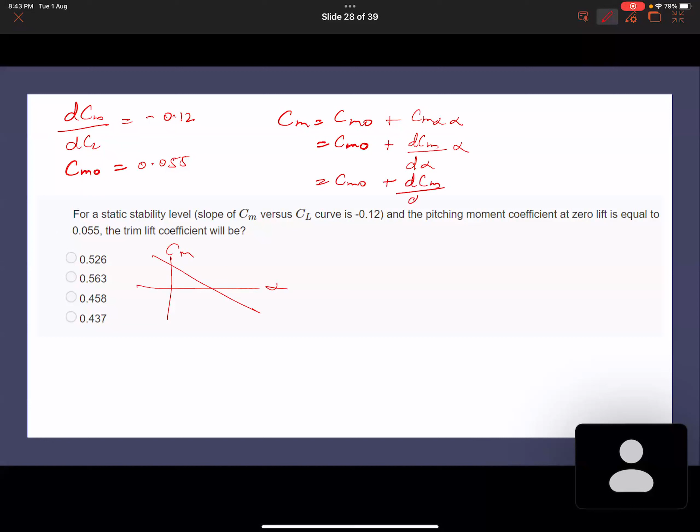We don't have dCm upon d alpha, we have dCm upon dCl. So let's modify this to get that term: Cm naught plus dCm by dCl into dCl by d alpha into alpha. What do you get? Cm naught plus dCm by dCl into Cl alpha into alpha. Cl alpha into alpha is what? It is Cl, correct? So Cl alpha into alpha is just Cl.

So now we have this. They've asked you to find Cl at trim. At trim, what happens? At trim your Cm equals 0. So your LHS is 0. So what do you do? 0 equals Cm naught plus dCm by dCl into Cl.

Now plug in the values and tell me what is Cl at trim. What is Cl? 0.055 by 0.12 - what is this value? It's a simple division, just tell me the value. Use your calculators, your phone calculators, tell me the value.

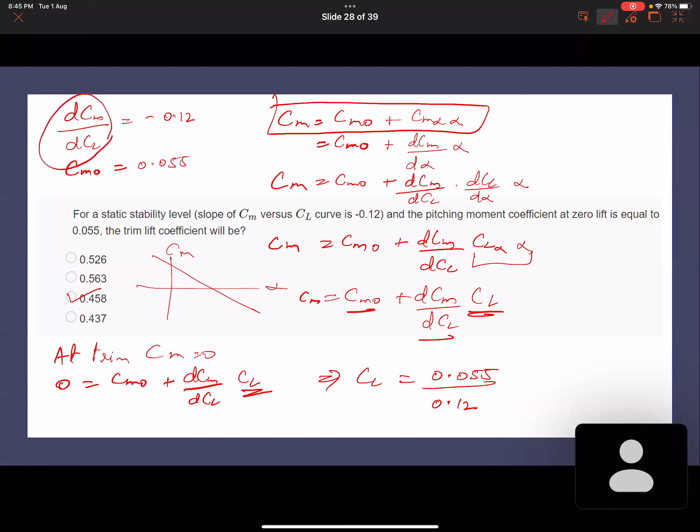0.4583. Okay, I haven't calculated it, I'm hoping that's the right answer. It's a simple division. Is this easy to follow? Any questions? So I started with the straight line equation and modified it to include the terms that we have.

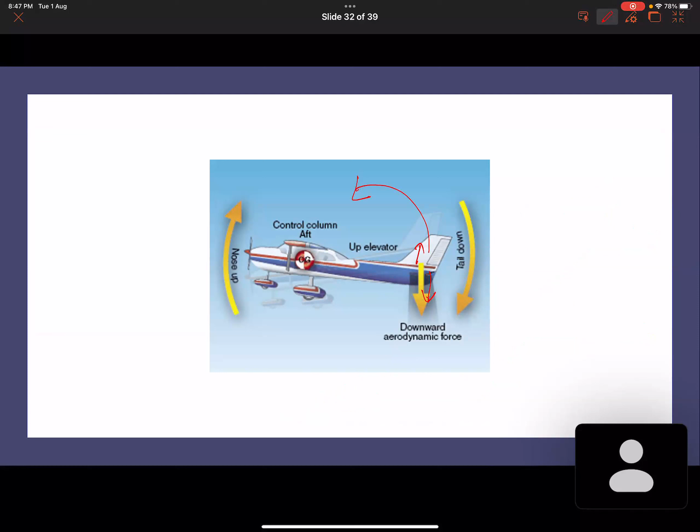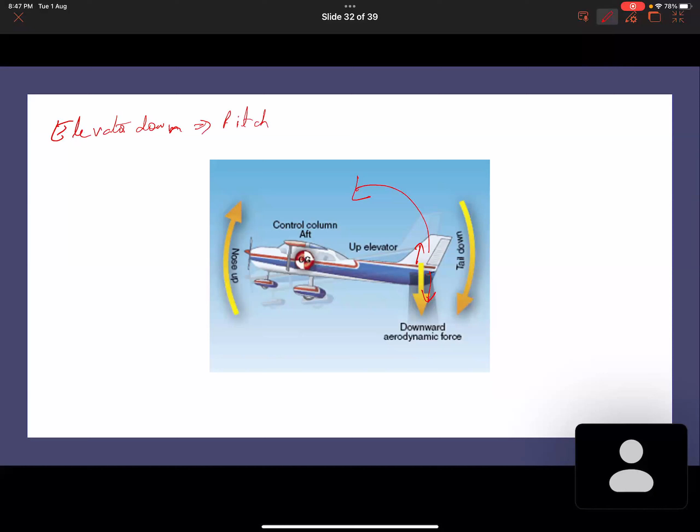Now, this shows how the elevator works. Deflecting the elevator downward creates an additional delta L which pushes it in this direction. If you deflect the elevator up, it produces a lift downward and will produce a nose-up motion. So if I deflect the elevator down, will it be nose-up or nose-down? Elevator down - yes, nose down. Elevator down, pitch down.

So this is one thing I wanted to bring up in this class: what is the difference between the yaw angle and side slip angle? Yaw angle, we just saw what yawing motion is - if your aircraft is moving in this direction, this would be yaw, and the angle is psi. How is it different from the side slip angle? There is a difference - can you tell me how?

So yaw, you understood, right? This side is understood. If your aircraft is initially going in the forward direction and then you turn it, that angle from the reference plane is yaw. What is side slip angle? It is similar, but not the same thing. What is the difference? Okay, what is angle of attack?

Drifting of the plane. Okay, that is not very clear. What is angle of attack? Alpha - what is alpha? Can you tell me what alpha is? I feel like I should have begun with this question. What is alpha?

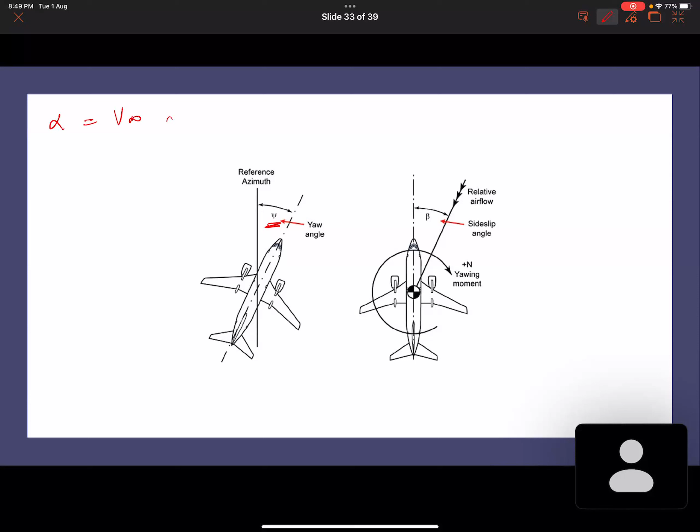Angle of attack - can someone give me the definition of alpha? Angle between relative wind and... flight path? Okay, relative wind and the chord line of the wing - that is the proper definition, not flight path. It is the angle between alpha, the angle between relative wind, that is V infinity, and the chord line.

So beta is a similar quantity. Beta is the angle between... Initially, for our regular calculations, V infinity happens in this direction. Now if there is a gust and V infinity is shifted in this direction, the angle between the fuselage reference line and the relative velocity is beta. We are not turning the aircraft, your velocity is moving - turning the aircraft would be yaw, we want to turn it, so it is yaw. But when the oncoming velocity shifts from this direction to this direction, it is side slip.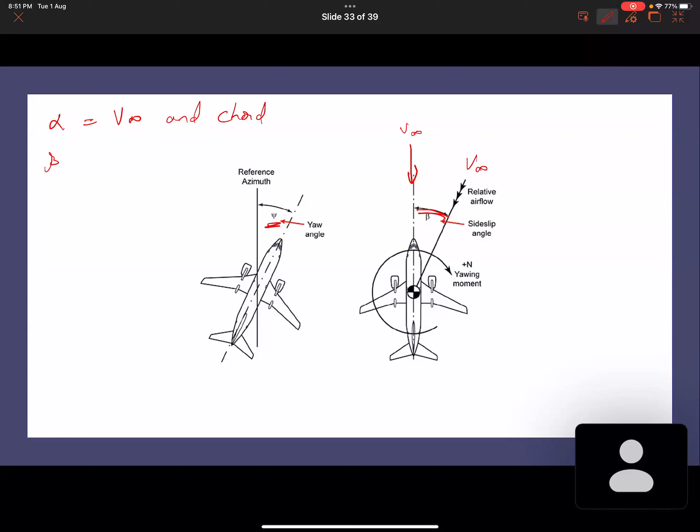So it was initially perpendicular, and because of some wind or gust, it shifted towards one side, forming an angle with the fuselage reference line. That is side slip. But if you're turning your aircraft, that is yaw. Do you see the difference? Think about it, read about it a little more, and come back to the next class. The difference between yaw angle and side slip - go through it before the next class. This is a common confusion in every course.

Now, stalls normally occur on what part of the wing first? Wing tip, wing root, wing midsection, or at no point? What was stall? People had mentioned 3 points. What was stall?

Ma'am, where maximum... ma'am, where the lift is zero. Where the lift suddenly starts dropping. Yes, where the lift is zero - but initially also the lift is zero, so we can't say that. Okay, so it's where it crosses the maximum lift and then starts dropping suddenly. That is when it stalls, when it doesn't produce enough lift to keep the aircraft flying.

So does it happen first at the wing tip or the wing roots? Wingtip. Can you tell me why? At the wing tips we have vortex generations, like I told you. Because of these vortex generations, the effective angle of attack at the wing tip is reduced. There is a drag component there, so the angle of attack at the wing tip is reduced. So even if your wing root is at stall, if you take the same angle at the tip, it becomes reduced, so your root has a tendency to stall first, which is why wings generally have a twist.

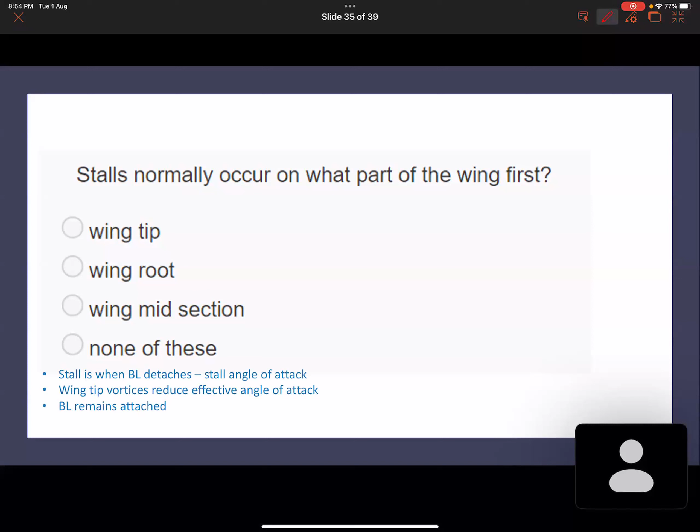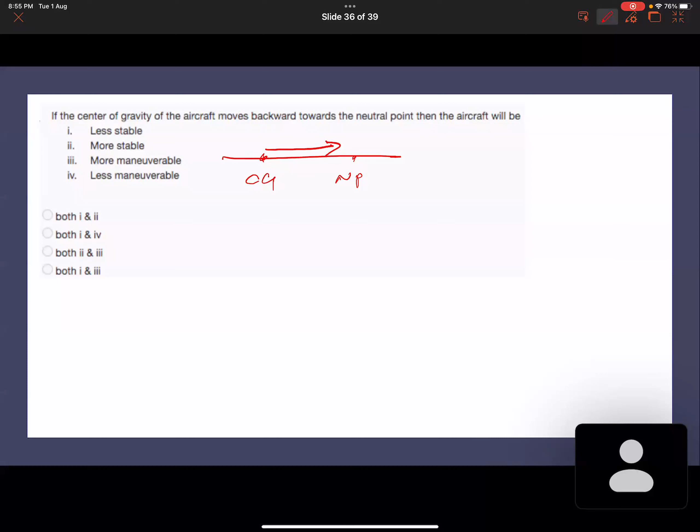Now, if the center of gravity of an aircraft moves towards the neutral point - we just discussed this simple question. So if your CG is here and neutral point is here, now if CG moves towards neutral point, will the aircraft be more or less stable? Ma'am, less stable. Yes, less stable - stability and maneuverability are inverse. If your aircraft is very stable, it becomes very difficult to maneuver; you need to put in large efforts to control it. Similarly, if your aircraft has very less stability, it's very easy to maneuver because the resistance offered is very less. So when you move your CG towards the neutral point, your aircraft becomes less stable and more maneuverable.

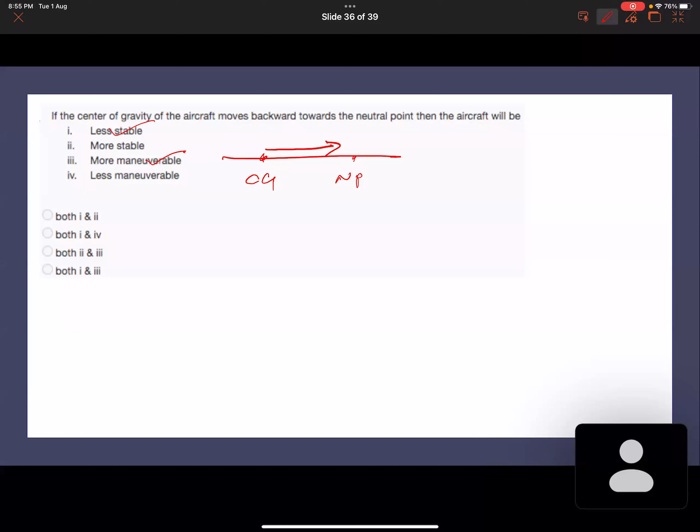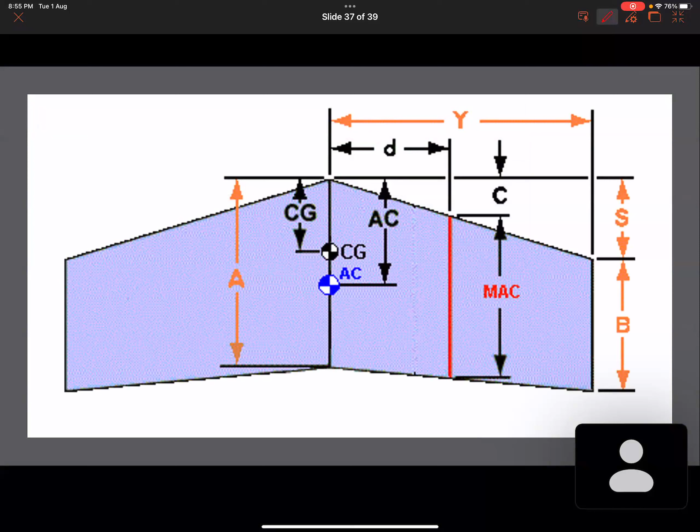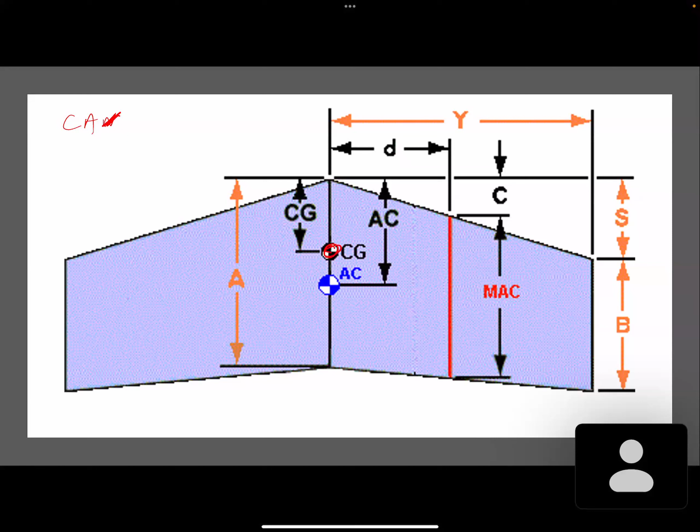They are inverse. Now I will just show you 3 configurations, no questions, just configurations. This is the wing alone configuration - I had told you this mnemonic CAN. So if it is wing alone, you don't have a neutral point, you only have C and A. For a stable configuration, your CG should be ahead of the AC. This is wing alone. Next, you have wing and tail - for wing and tail you have CAN, you have a neutral point, and your CG should be ahead of the neutral point.

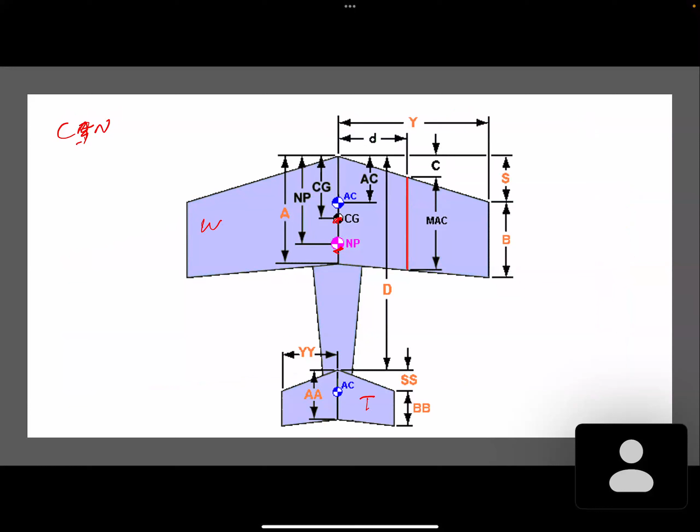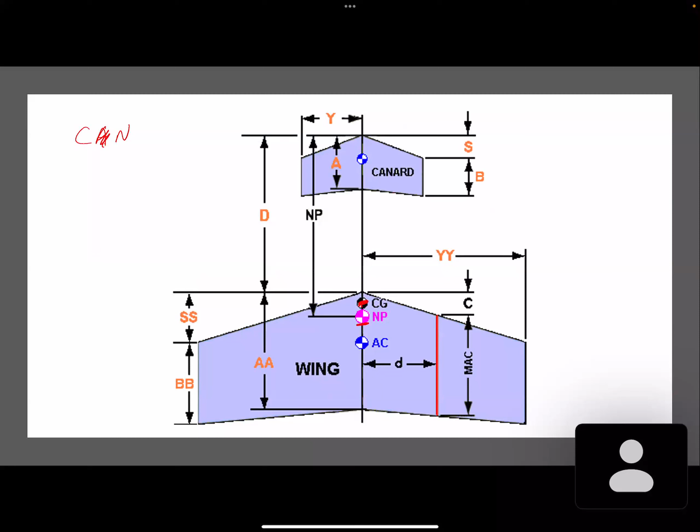Now there is a surface called canard. What is canard? This is your wing and this is your tail - what is the canard? Canard is a similar structure fixed ahead of your wing. Something behind your wing is tail, ahead of your wing is canard. You may have seen this on some supersonic aircraft. So again, CAN for this combination - CG should be ahead of the neutral point for a stable configuration. So I was just showing you the various configurations: wing alone, wing plus tail, canard plus wing. In each case, the CG should be ahead of either the aerodynamic center for wing alone, or the neutral point. With this, we come to the end of this session.